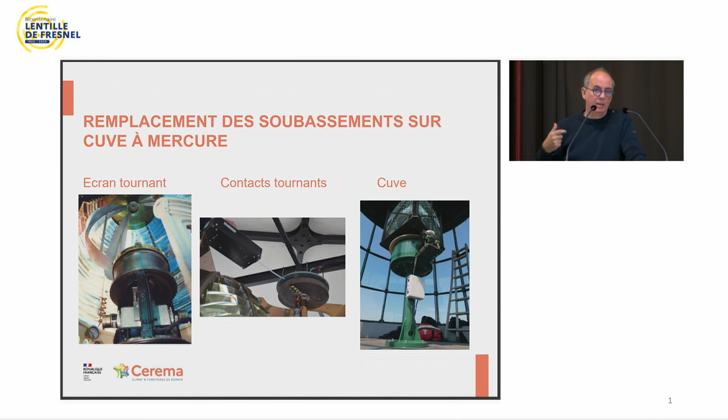And so these tanks need to be replaced for several reasons. First of all, for environmental reasons. If mercury overflows, it could fall into the sea. And also for reasons of health and safety at work, because in hotter environments, the mercury can evaporate and could reach a certain concentration in the air.

So to get rid of this mercury, several solutions have been considered. First of all, to do away with the rotating screens like the one we saw at Cordouan, the easiest solution is to have a flashing light. So we have the light which goes on and off rather than rotating the screen around it.

Another technique is to reduce the range slightly and to use an industrial lantern like the one you see here, which is obviously much less attractive than the Fresnel lenses, but which does work. It has its advantages and some drawbacks. The advantage is that it's quite easy to use. The drawback is that it's quite expensive and isn't really respectful of our heritage.

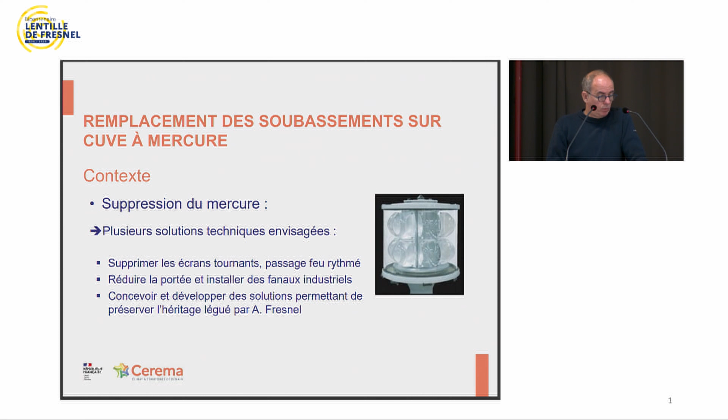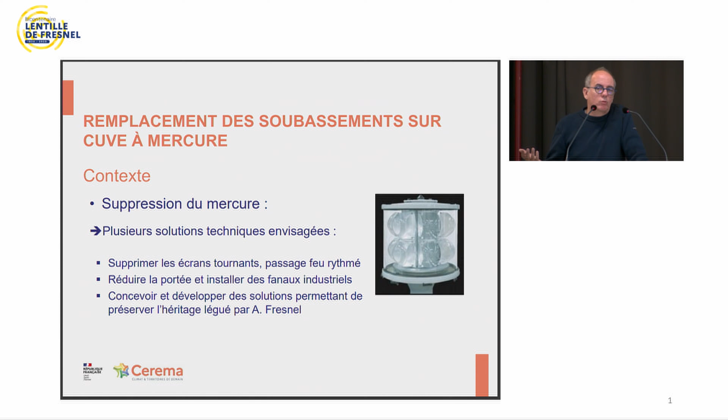And the last thing is to try to come up with alternative solutions without mercury, often with ball bearings, to try to preserve our heritage.

And what we're trying to do is to keep the heritage aspect. It is important. Many people do feel a strong attachment to these lenses. Some lighthouses also receive visits, and we want lighthouses to be visited because this is a way of opening up the lighthouse. It's good for the lighthouse too, and it also conserves our heritage and the civil engineering structures.

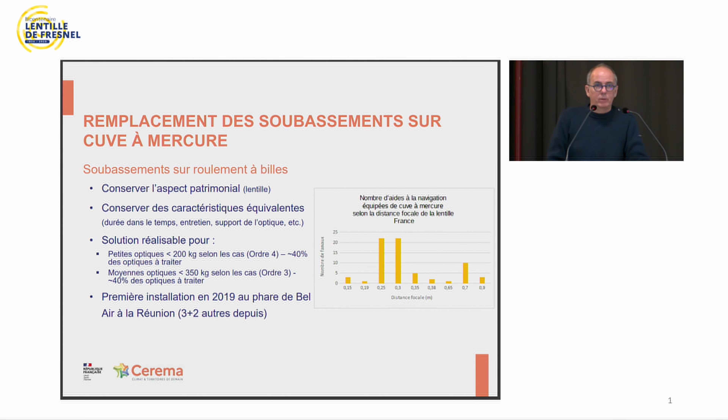So a test was done at CEREMA, that's the research organization I work for. We did a first installation in 2019 at Bel Air Lighthouse in Reunion Island. Generally, we do this first of all in more remote places like Guadeloupe, Reunion or Martinique. This is interesting because first of all the environment is hotter, so there's more risk of the mercury evaporating. There are also problems of earthquakes which can pose problems. And then it's a way of seeing how it goes.

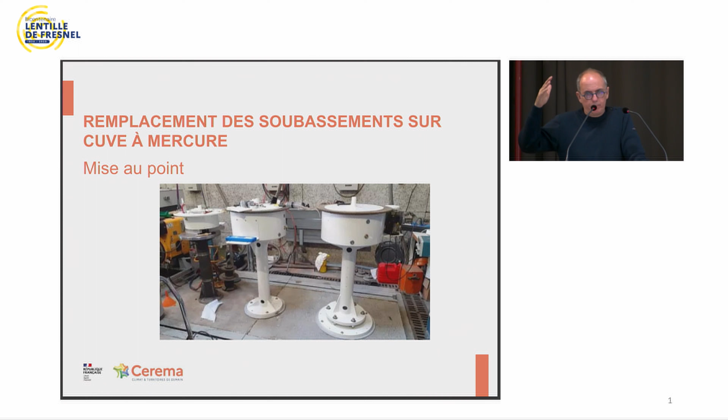And it works very well, in fact. So here, this is shown in the premises of the CEREMA laboratory, with two tanks with the ball bearings in an oil bath which are being tested, and which we try for a time before they are installed on site. And so we're going to see in the photographs afterwards, perhaps in more detail, an example.

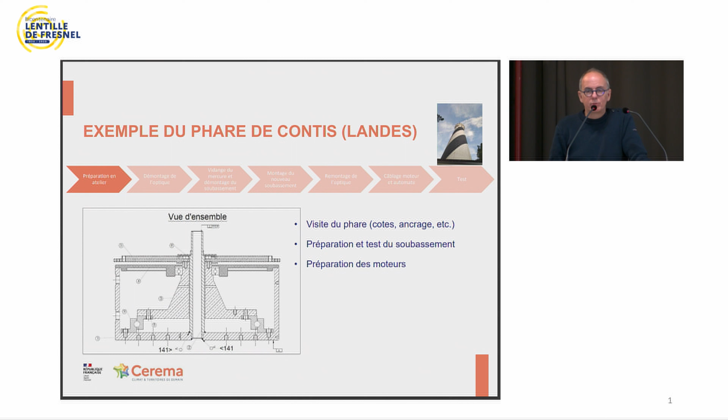And as we are here in the region, we thought we would show this installation of a system with ball bearings at the Contis Lighthouse in the Landes region to the south of where we are here. And so you see a photograph here, top right. You have a cross-section with two systems of ball bearings, one for centering, one supporting the lens. And some people call this the chip pan because it has the shape and we're putting oil into it.

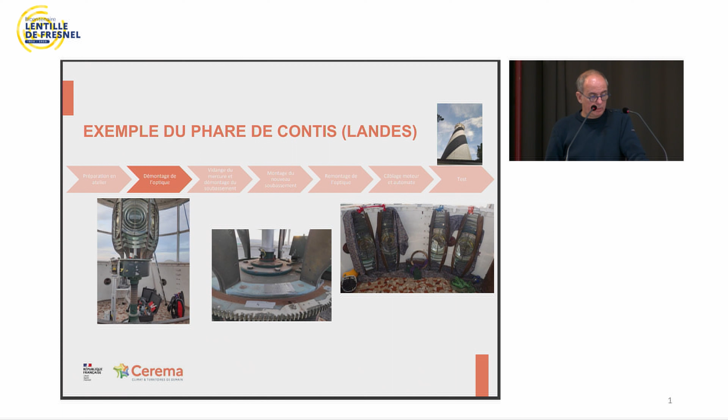So when we arrive, we have to take all the measurements to see where we're going to do the installation and drill the holes. Then we disassemble, we remove the panels. The difficult thing is draining the mercury from the old tank. How do we get the mercury out of it to be reused, or once it is recovered, it's handed over to a private company for reuse.

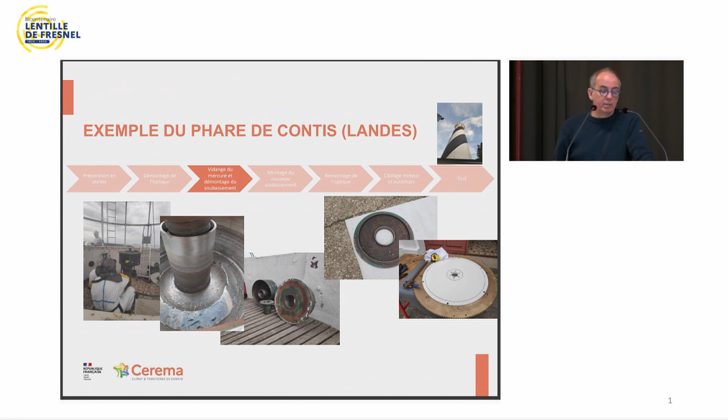One thing I forgot to mention earlier is that in the specifications we wanted it to be possible to transport everything by hand. One of the problems we have in lighthouses is we can't always bring in big, heavy machinery to transport tanks. So it's better to be able to dismantle things into small parts, small components, and to disassemble or assemble on site to avoid needing heavy lifting machinery.

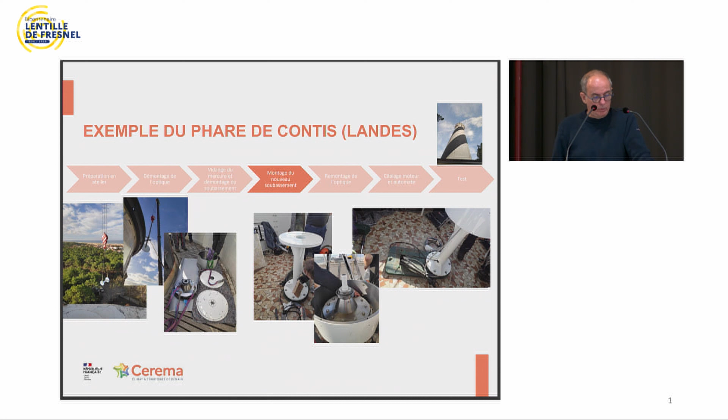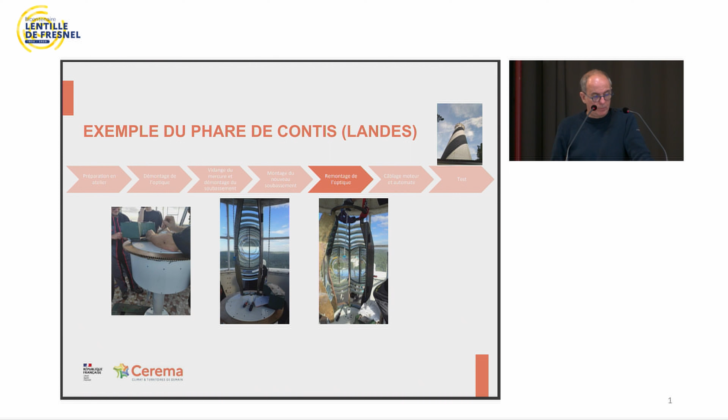And once the mercury has been drained and the lenses and former tanks have been removed, we have to install the new tank. Here once again you have some photographs from the inside with the system with the ball bearings. And then at the end we set everything up again. Here you have a photograph showing the motors.

Now, as I said earlier, mercury is something very efficient, which enables the lens really to rotate very, very easily. But with the ball bearing system, in fact, there's very little difference. It works very well too. And it was possible for us to keep the same motors with the ball bearings as the ones we had with the mercury. So here there are two engines, a main one and a backup engine. One of them operates 70% of the time, the other about 30%. So if one breaks down, the other one can take over.

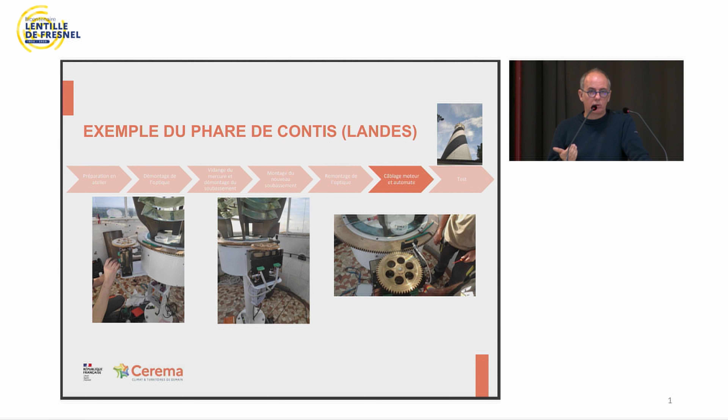So the lighthouses and beacons require very technical solutions with a long lifespan and which are easily repaired. And so there you have it, with the light on.

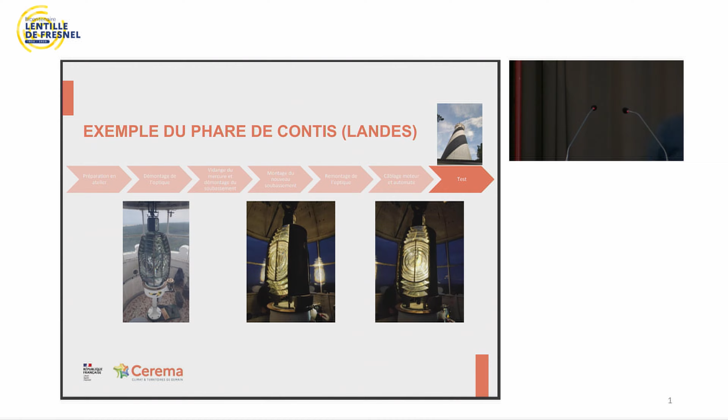Okay, so for any questions on this subject, we'll take them now. Would anybody like to ask? It's a rather specific subject. He really doesn't want to take any questions. He wants to wait till the end of the session. Okay, so I'll call the next speaker. We'll keep the questions for later.

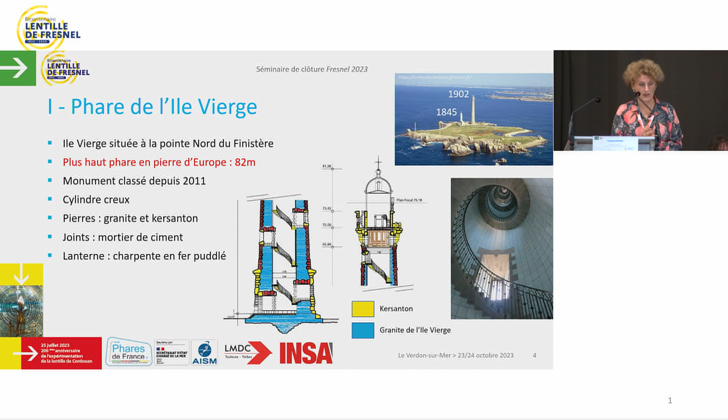It's been a listed monument since 2011. It is made of granite, which has been taken from the island itself, and a stone from Brittany, which is called Kersanton. It's a lot like granite, but in fact it is not granite. The joints are cement mortar, and the lantern is puddled iron. It's a puddled iron framework.

So why were we contacted by Cerema? Because initially my profession is I'm a civil engineer, so I do research in civil engineering. Why was I contacted to do research on this lighthouse? Well, because the Île Vierge lighthouse is actually in rather good condition, but there were a number of pathologies, problems

as the metal posts that support the lantern and that enter the wall on to the internal face side of the wall. So the fact that we have structural disorders with these walls supporting the lanterns, that happens quite often. But in this case, we were contacted because we could not understand the origin of the cracks.

So in 2017, we started our research program, civil engineering program, to understand the origin of the cracks, and this led us to start with historical research in the archives before we started working more on the civil engineering aspect, and maybe make hypotheses on the causes of the cracks. So some of our hypotheses, well, the first one was that it was simply the iron in the lantern. Well, the iron had corroded. So because of the corrosion, there was rust, and that gave rise to the opening of the cracks.

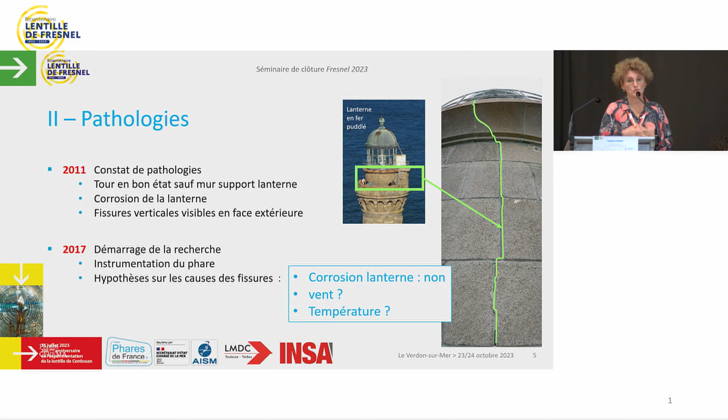The next most logical hypothesis was the wind, because we have an 80-meter high lighthouse out at sea in a region where, of course, we have storms. So the most logical thing would be for the wind, when it pushes on the lantern, to create openings and therefore cracks. So that is the first thing we explored, and that led us to look at a historical overview. So the first thing I asked myself was, in the 19th century, did we calculate the tower, and did we take the wind into account when we calculated the height of the tower?

This led me to search in the archives, and there were many, many archives, luckily. So lighthouses and beacons kept all the texts from the time, all the letters ever written. The engineers at the time at lighthouses and beacons asked themselves many questions because they were aware that they were building the highest lighthouse ever built. And so they asked themselves questions about the calculation methods.

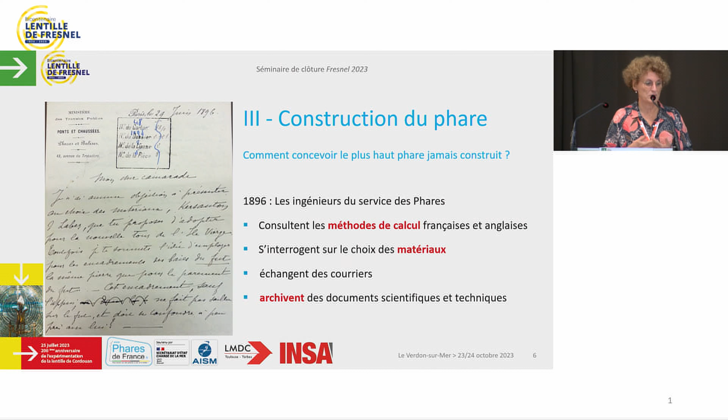And this is where it becomes very interesting when you're doing research, because they discussed many things: this is how some are doing it, this is how others are doing it. There were many letters, and all of these letters were kept, and they provide very valuable information on the methods for design of lighthouses in the 19th century.

Now, just to try to sum up a few of the conclusions of the historical research on how engineers took into account the action of wind on a lighthouse. And this is where I found out that Augustin Fresnel had played a key role in the history of civil engineering, despite the fact that he was known only for his founding role in optics. But you know that back in 1825, the mission of Augustin Fresnel was to build the Baleine lighthouse, and he asked himself how to provide theoretical calculations to check the stability of the lighthouse.

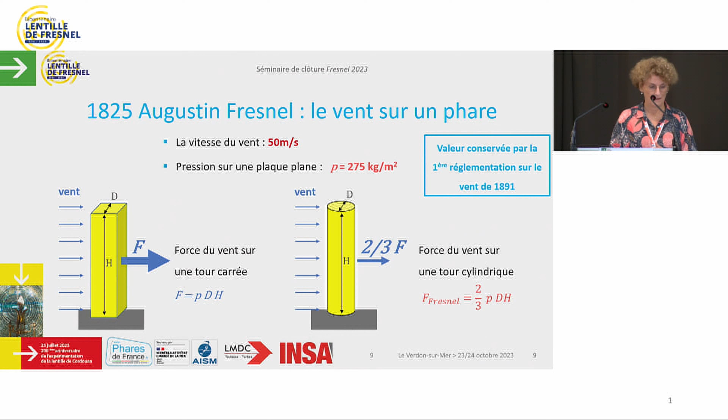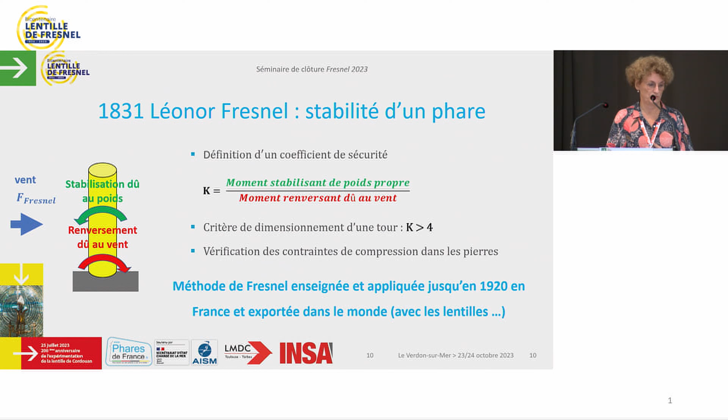And as we've already said, Augustin Fresnel did not live very long. But his brother, Léonor, took over, and Léonor drew up all the calculation methods invented by his older brother, and he created a method. So I'm not going to go too much into the mechanics of it, but he explains how you take into account the self-weight stabilizing moment and the rollover moment due to wind, and he created a safety coefficient which needed to be at least equal to 4 as a dimensioning criterion for a tower.

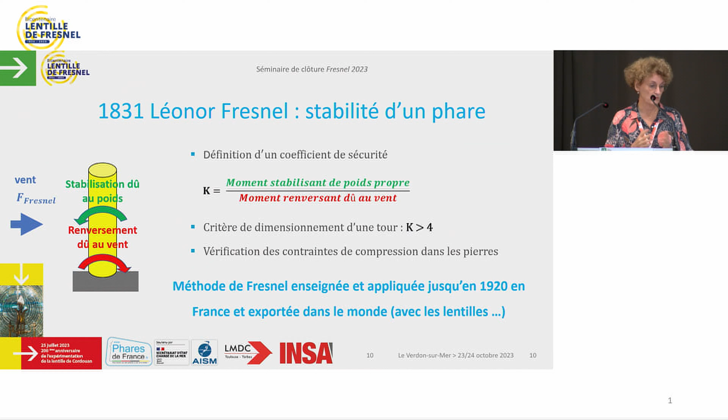This method was developed by the Fresnel brothers. It was taught and applied until 1920 on all the lighthouses built in France and exported throughout the world at the same time as lenses.

Now, to continue on the Île Vierge lighthouse, we come back to the end of the 19th century, around 1896, the engineers said, well, how can we have such a high lighthouse that would not suffer from oscillation when the wind starts blowing? Because we knew that the mercury tanks could in fact overflow if that happened too much. So we created the first oscillograph, which measured the period of oscillation of the lighthouse. And in 1905, it measured a period of 0.775 seconds. And I found this in the archives.

So we see that for wind speed, Fresnel had said it was 50 meters per second. The top speed, the peak speed calculated with the European standard is 53 meters per second. The total wind load with the Fresnel method is 140 tons. The total wind load is 75 tons with the European method, but you have to add a 50% increase, which means that you reach 113 tons.

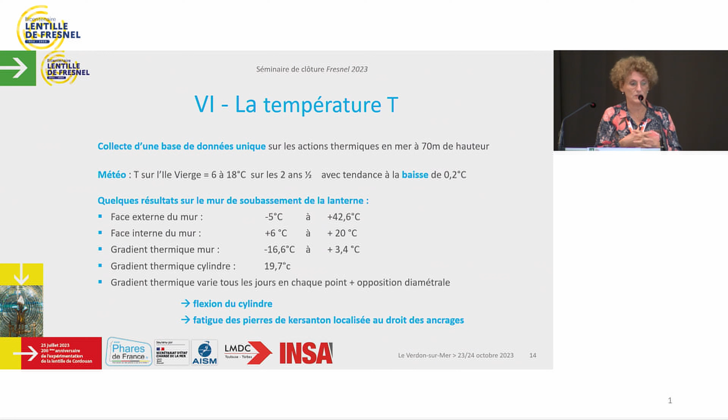In fact, things don't get worse. They just go back to the starting point and start again. But there is constantly this ovalization effect of the cylinder. This variation every hour, every year for hundreds of years creates what we call a thermal fatigue phenomenon. So the stone experiences fatigue localized at the anchor points. And this is what, in our opinion, triggered the opening of the cracks and continues to allow these cracks to develop and come back.

So in conclusion, this research really showed me the founding role of Augustin Fresnel in the history of civil engineering, not only of optics, and in the calculations for civil engineering structures in relation to wind, because his hypotheses were kept for over 150 years. We had to wait for the progress of the aeronautical industry and knowledge of turbulence for his work to be added to. But that was 150 years later.

The lighthouse itself does not suffer from wind or from corrosion. It suffers from temperature variations. Fortunately, these phenomena come in cycles, so I'm not worried for the future of the lighthouse. These conclusions can be generalized to all the lighthouses that we work with.

We also observed that the temperatures we measured are higher than those indicated in the European standards. This is an important result because all the bridges along the coastline of Brittany are calculated with the same European standards. So we had questions about the European standards, so I'm happy with that as well.

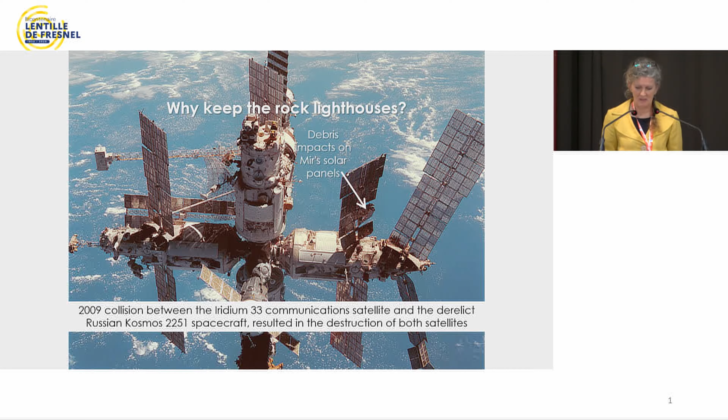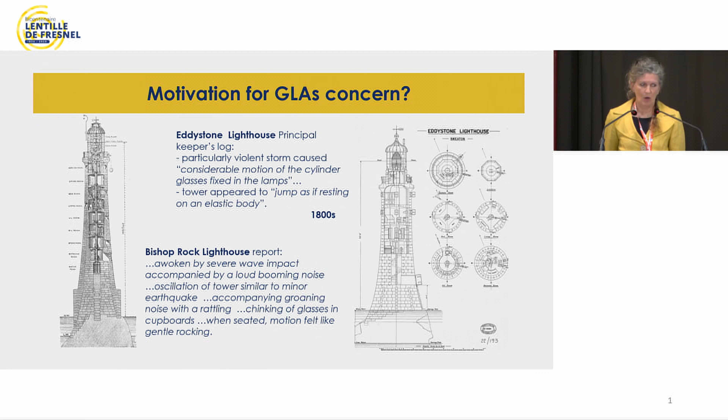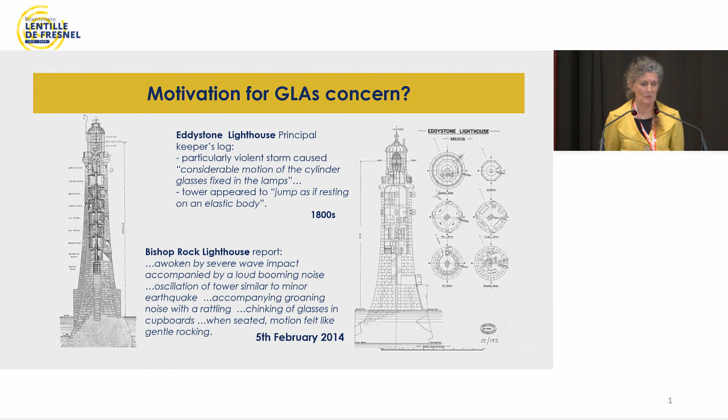Something from the Bishop Rock Lighthouse, further to the southwest, with a report they were awoken by a severe wave impact accompanied by a loud booming noise. So pretty terrifying. But that was actually in 2014. So this was from a maintenance engineer who was on station during a storm. And in 2013-14, there was a sequence of 20 very large storms that hit the UK and the surrounding region. With climate change, there's predictions of increase in the sea level. So if the waves are riding on deeper water, then they will be hitting the towers higher up.

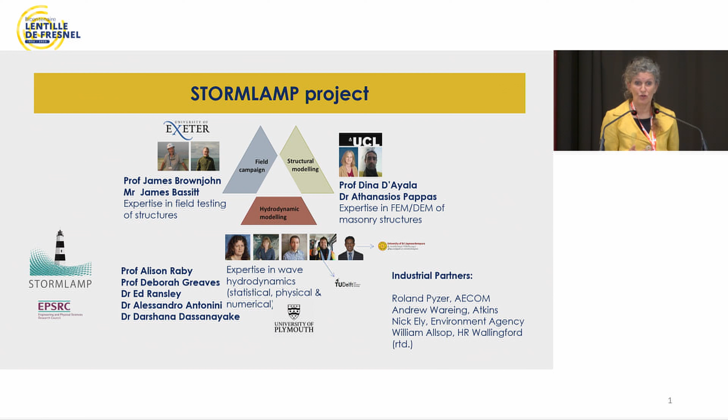And so back in 2010, we were contacted by Trinity House originally. The University of Plymouth has done lots of field work on more generic coastal structures, and they commissioned us to look at loading on the Eddystone lighthouse. We have line of sight from the university campus out to the Eddystone Lighthouse, so we could communicate with it fairly readily. Following that successful Eddystone project, we put together a much larger project. University College London did the structural analysis. University of Exeter did some of the field work, and at Plymouth we managed the whole project and looked at the hydrodynamics. So we were particularly interested in the wave aspects.

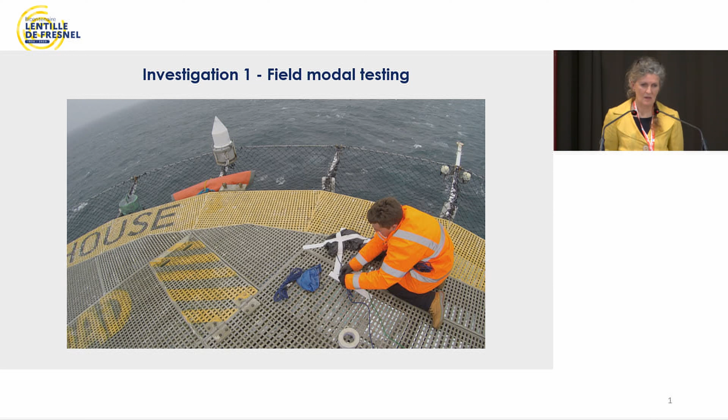So we did some field modal testing, which I'll speak about now. This is on top of the Bishop Rock Lighthouse, I think. These are accelerometers placed on all the different levels of the tower, and then we shook the towers.

So we shook the towers and also looked at the measurements from the wind. The key findings were that the inclusion of a helideck structure on top of the towers, which is fairly unique amongst the lighthouse authorities, actually changes the structural response and the modal mass. So that was an interesting finding.

But also with the data that we have, we can now work out, from an inverse modelling, what the size of the wave must be to create the vibration that we can measure.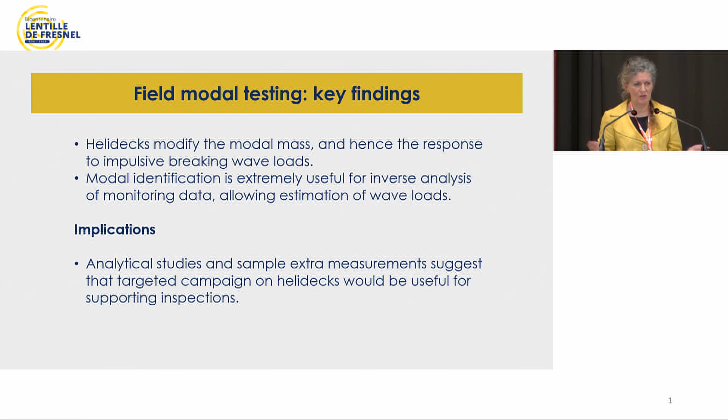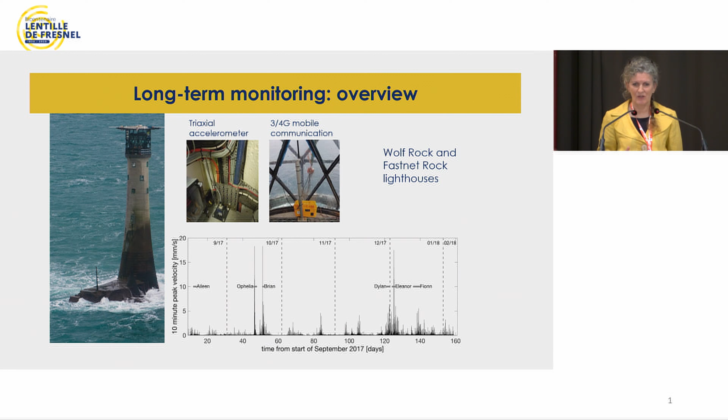The long-term monitoring we did on 2 towers, the Wolf Rock Lighthouse and Fastnet. This is data along the bottom from the Wolf Rock Lighthouse, and you have a graph showing a number of spikes, and those spikes correspond to the maximum velocities for different storms - Storm Ophelia, Storm Brian, Storm Dylan, etc. From those velocities we can calculate what the accelerations are and what the displacements are.

We also have on the Wolf Rock a camera system - 2 cameras pointing in a slightly different direction from each other. We can get some photogrammetric information from that, so we can work out what the size of the wave is. Because we only have a limited amount of power on the lighthouse, we have to switch the system on and off, and we've had problems with remotely operating the cameras, but we do have some good data now.

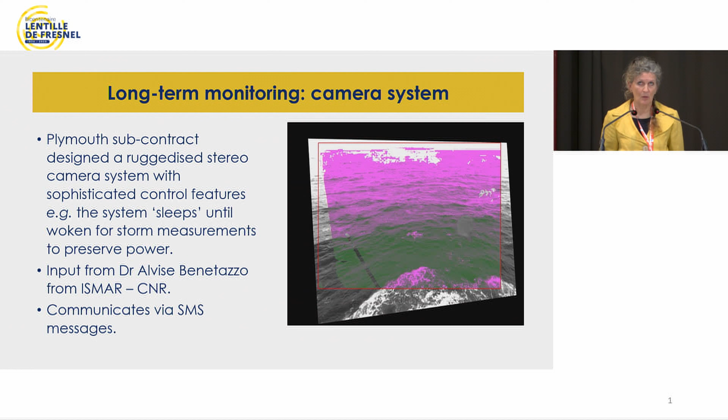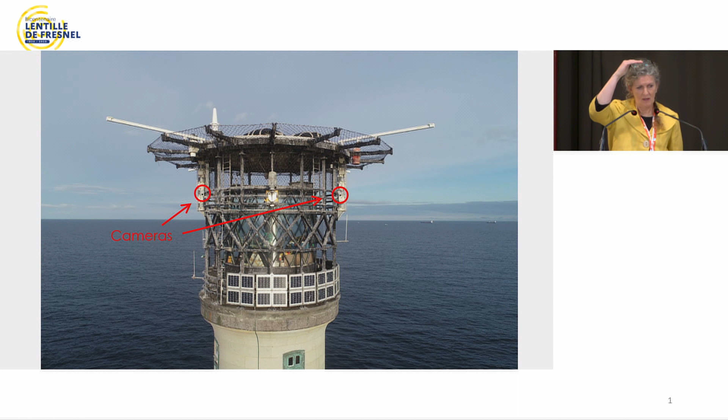And we worked with Dr. Alvise Benetazzo and Filippo Bergamasco from ISMAR at CNR. Here are the cameras on the side of the helideck structure. You can see a very nice photograph where the lantern dome has obviously been removed and the helideck structure is constructed on top, and this was done from the 1970s.

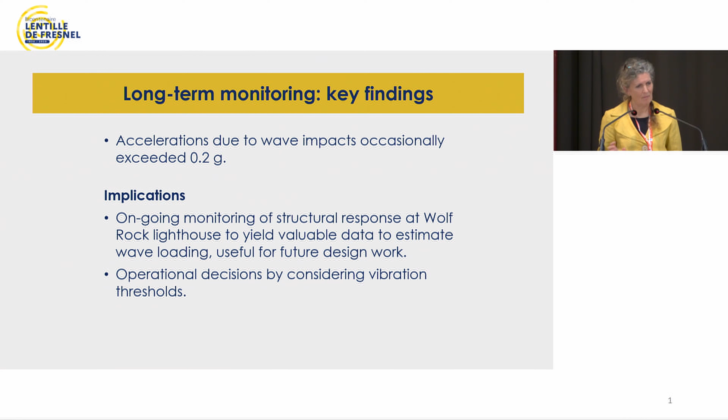The findings: from the velocities you can calculate the acceleration, and the acceleration occasionally exceeds 0.2 g. That is in fact equivalent to a small earthquake, so it's not surprising that the lighthouse keepers were relating it to earthquakes.

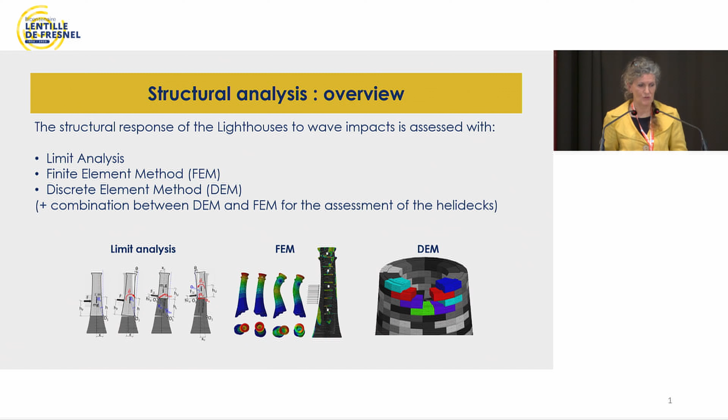For the most comprehensive analysis, we did a discrete element analysis of the rock tower and then a finite element analysis of the helideck on top. We were able to identify some of the locations - can I use this pointer? Yes - some of these locations of the high stresses, so at the top of some of these bars.

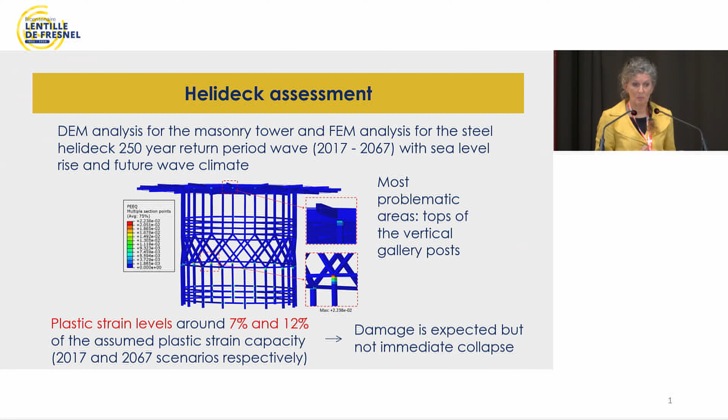And we did the modelling with projections of the increase in wave climate over the next 50 years. This can be used for operational reasons and inspections, and in fact we've just been involved with redesigning the Bishop Rock helideck. Won't dwell on that. So the hydrodynamics - this is a photograph from the University of Plymouth Ocean Basin.

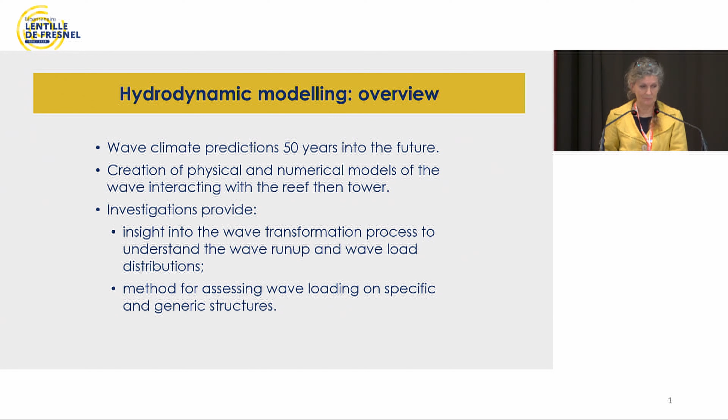We did some modelling of the wave climate over the next 50 years, and did physical and numerical modelling of the waves interacting with the reef. We started with a very simplistic representation of a cylinder on a simple foreshore structure of different angles, so we went 1:1 all the way down to a 1:5 slope, and we did that at 1:81 scale.

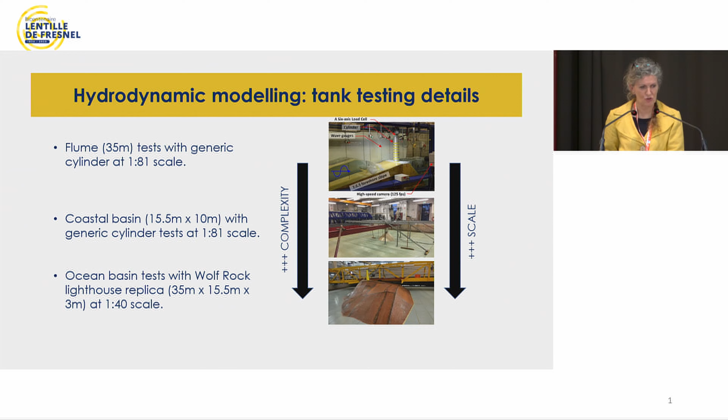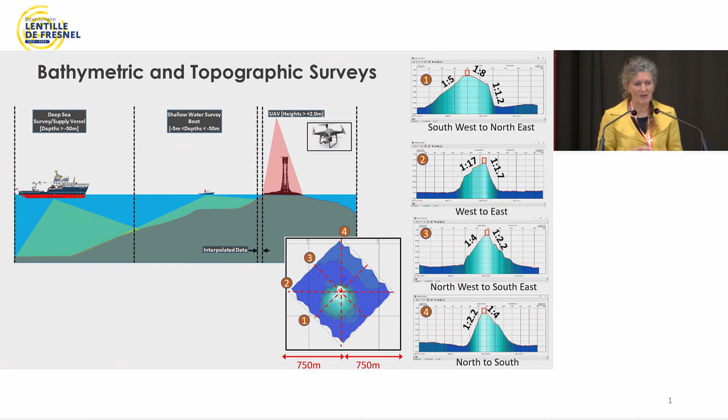We then went 3-dimensional into our coastal basin, and then went to a larger scale and represented very accurately the bathymetry in that location. I'll take you through a few of these setups. Trinity House had their vessel, the Galatea, do some of the offshore bathymetry work, with a smaller vessel coming closer inshore, and then we sent a drone out there to get the topography information.

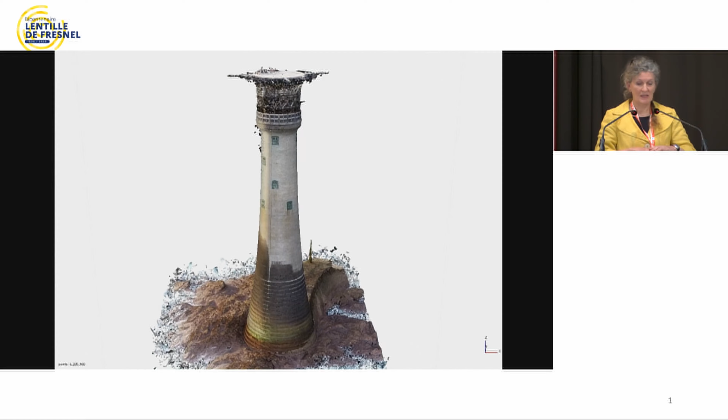So on the basis of this drone survey, we're able to digitally represent the tower, the exposed rock around it, and then connect that to the underwater bathymetry.

We constructed the lighthouse with a 3D rapid prototyping system. I think we had 7 individual pieces. You can see an aluminium core connected to a load cell for measuring the forces and moments, and accelerometers to give us movement information. Although it was a hydrodynamic investigation, we weren't doing a small-scale model of the actual structure measuring stresses - that wouldn't be appropriate.

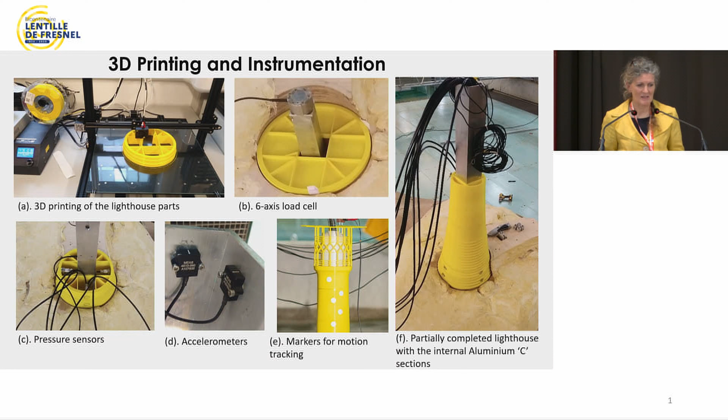And we had pressure sensors, so we could work out what the wave impact pressures were, as Natalie was describing their importance in the structural stability.